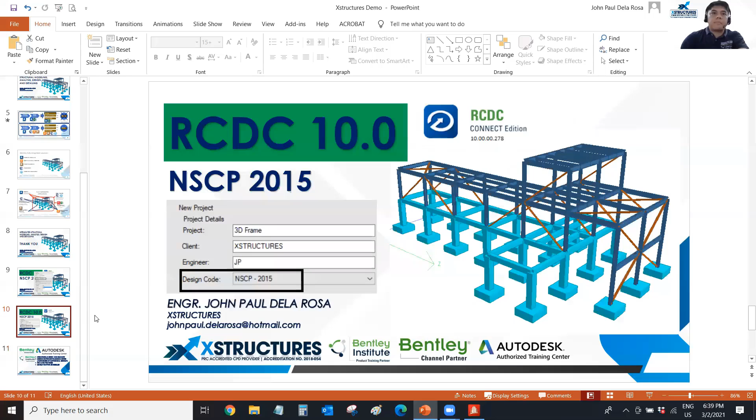Going back to the topic, this is our sample model. Let's discuss a little bit. This is a three-story building, and this is its loading.

So reference load definition, then seismic definition, seismic parameters, then we have primary load cases, and load combinations. Our design load combo here is only 101 up to 126, since other load combos are for the foundation design and other serviceability checks.

Starting with STAAD 22.0, RCDC is integrated inside STAAD Pro, so there's a direct link. But you can still use the standalone version of RCDC, which you can open from the desktop, then import your STAAD model or ETABS model. Even if you use an ETABS model, RCDC also supports the NSCP 2015 design code. STAAD Pro, ETABS, and RAM Structural System are all supported by RCDC.

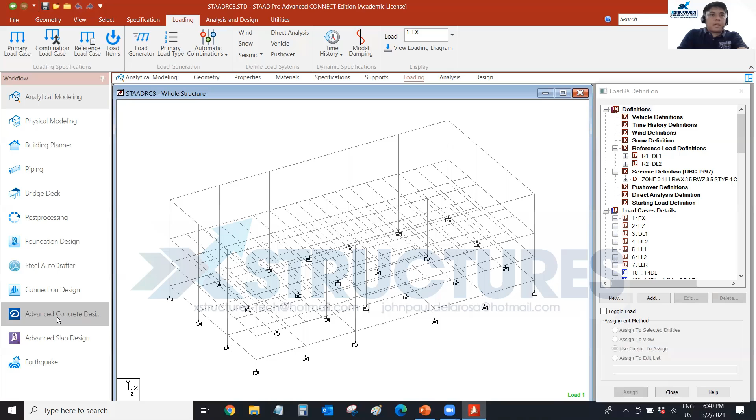On this video, I'm only going to be showing STAAD and RCDC integration. I will click this, the RCDC link. Okay, so here it is.

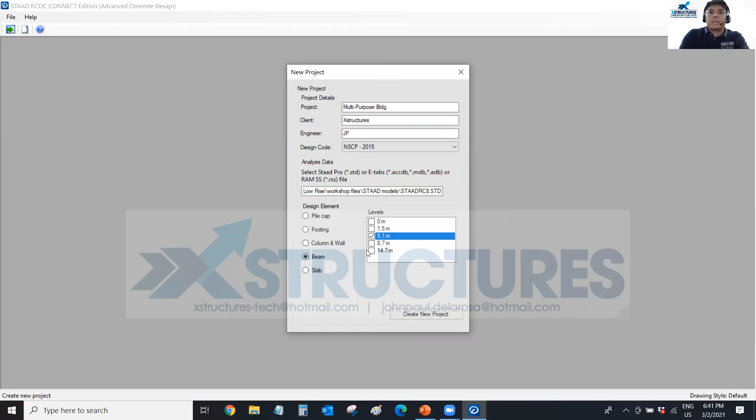NSCP 2015, and for the project, let's say it's a multi-purpose building. For the client, I'll just put X Structures, and I'll put my initials here, but you can put yours if you're the one designing the structure. Then for beam design, the program automatically reads what floor levels you have. In this case, I'll design the second floor, which is level 5.1 meters. Then I'll click Create New Project.

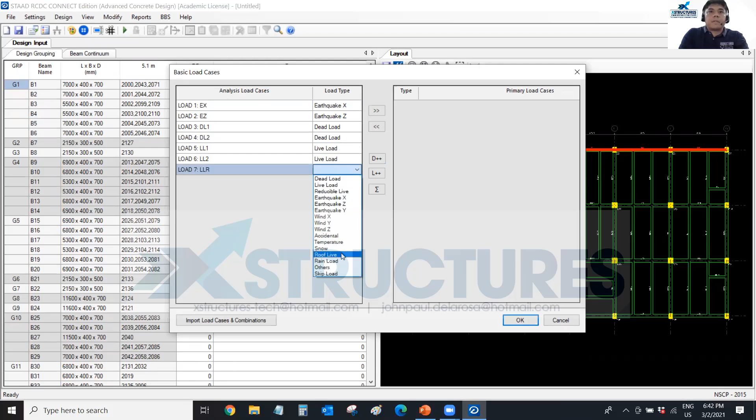The model is a bit large. So then I'll just set the primary load cases: Earthquake Z, dead load, live load, and this one is roof live. Then I'll move it to the right side and click OK.

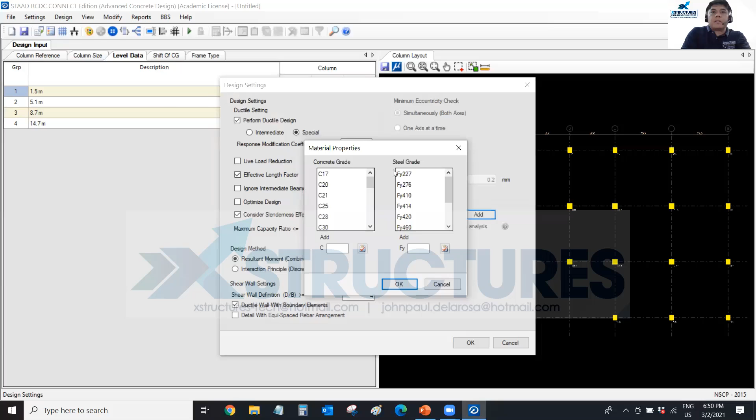Let me double check the material list here. So here we have our localized values, our FC prime which is mostly used here in the Philippines, as well as the FY, even the lower grade FY. Nothing to add here, so I'll just click cancel, then click OK.

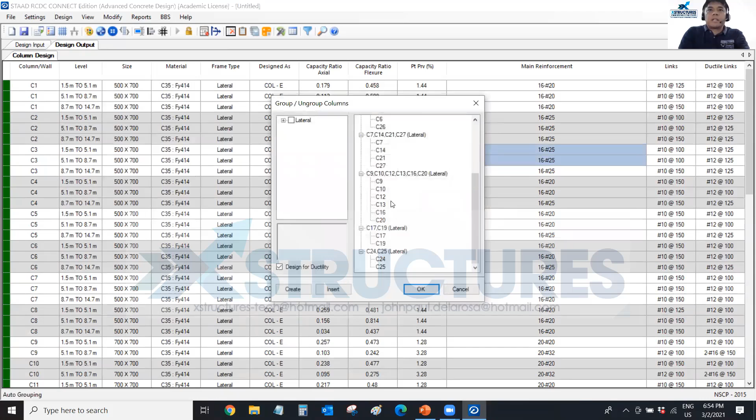I'll do the same thing with the other columns, then paste reinforcement. But I think it's better to group these first, run auto group columns first, so we can narrow down the number of columns, then copy and paste the reinforcement.

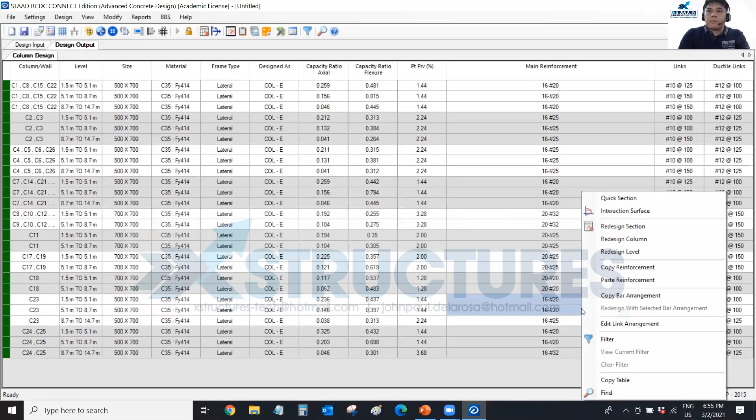This one is the same too. I think we can form another grouping once we run auto group again. So paste reinforcement here too, and also this one, copy then paste reinforcement, and also this one.

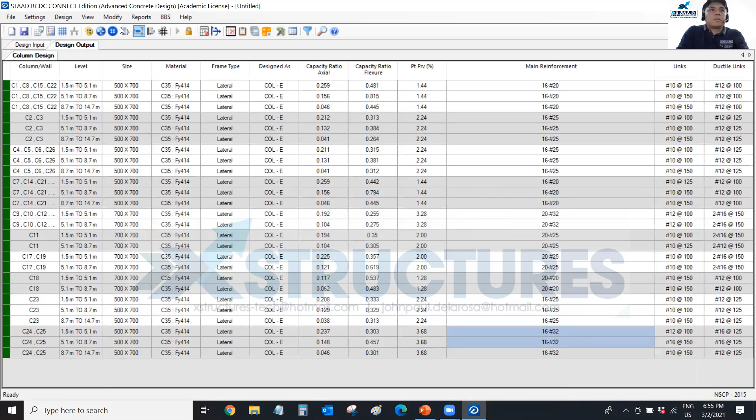Let's paste that. Now let's rerun the grouping again, so we can form more groups. Auto group columns, then click OK. So it narrowed down the grouping further, I think this is it now.

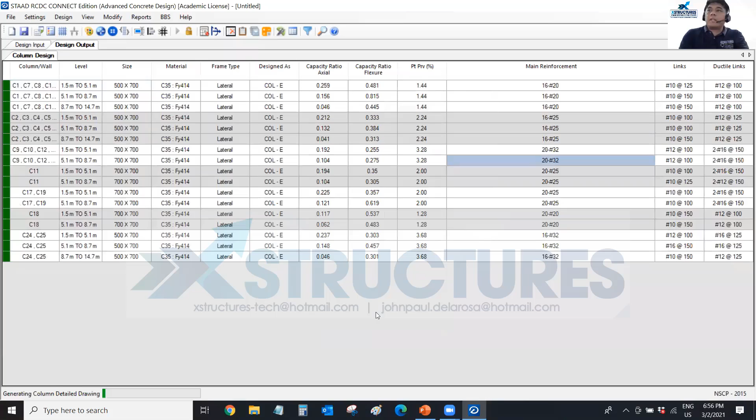So after this, let's produce the detailed drawing, which is the column schedule. So here it is, this is our column schedule.

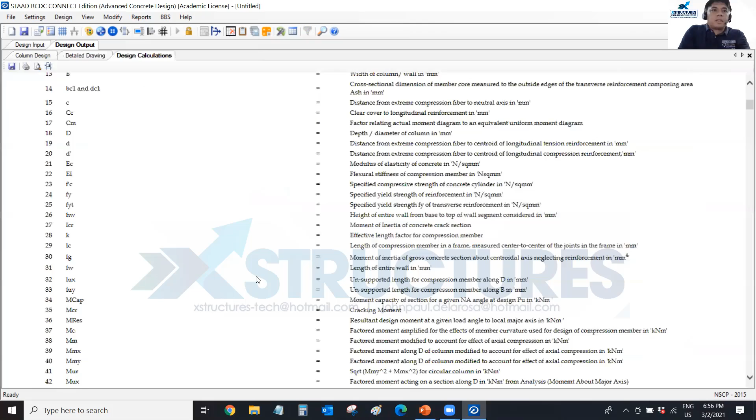And then of course the calculation reports, and the design calculation. I'll just show this since there's too much. Just to show the NSCP design codes here. So printed, here it is, NSCP 2015, and these are the code references related to NSCP, chapter 4, okay.

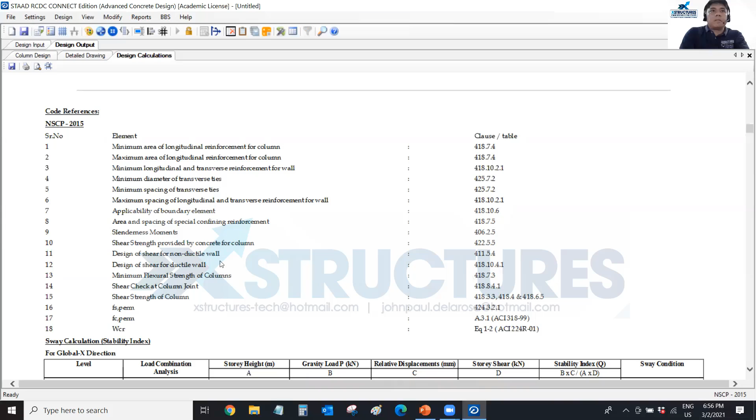Also included of course is the seismic provision of NSCP. And then bill of quantities, you can see here it now has peso values. This is included in the preparation of development, since before only dollars was the closest available, but now it has peso.

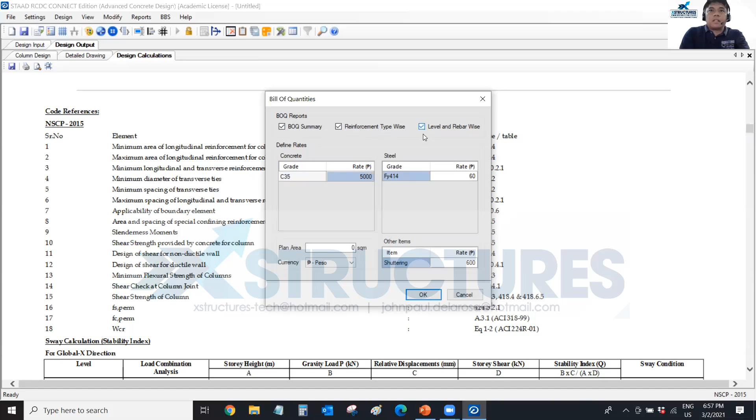So let's say in peso, let's say concrete is 5,000 pesos per cubic meter, and 60 pesos for the steel. Then let's just click this, and click OK, and that's it. So there's a total cost here in peso.